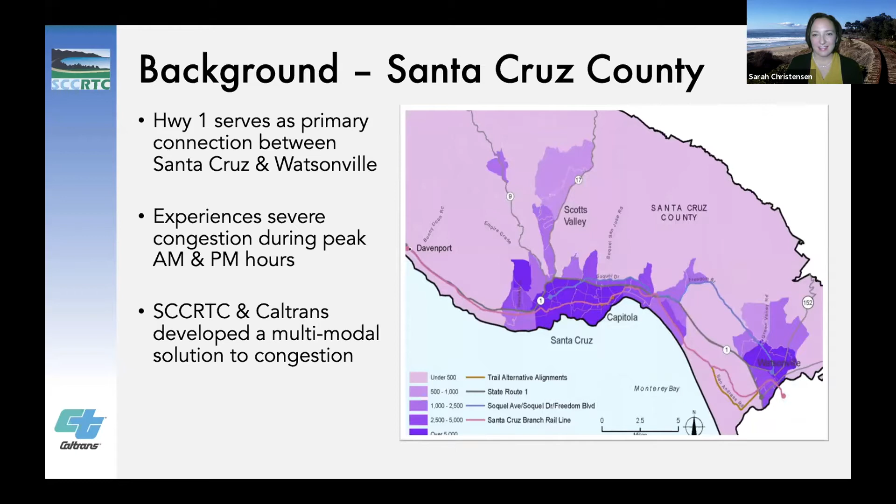What's unique about this county is we're one of only two counties in California with the ability to operate transit buses on the shoulders of major highways. This legislation passed in 2013 and allows Monterey Salinas Transit District and Santa Cruz Metro to operate buses on shoulders with approval from Caltrans and CHP. Monterey County is the only other county with this ability, but they've decided not to proceed with a bus on shoulder program at this time, so we have a really great opportunity to implement this on Highway 1.

I'm very happy and proud to say this project is fully funded. We have Measure D funds serving as a match for construction and to fund pre-construction activities, State Transportation Improvement Funds (STIP), and we recently were awarded a grant for three projects in this county from the California Transportation Commission. Those are Senate Bill 1 funds under two programs: the Solutions to Congested Corridors program and the Local Partnership program. With all of that funding, we are fully funded for this project.

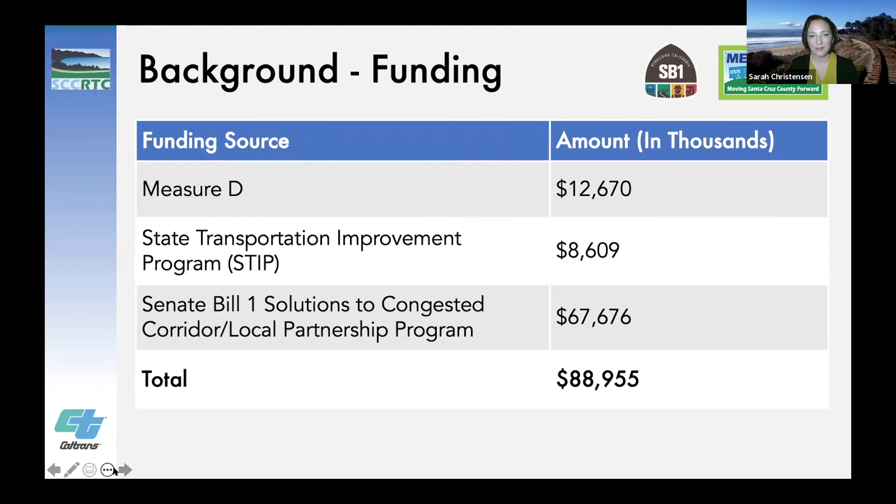As mentioned, we have a program of projects here. The first project underway, phase 1, will extend the auxiliary lanes. There are existing auxiliary lanes between Morrissey and Soquel, and this project extends them from Soquel to the 41st Avenue interchange. It will also implement a bus on shoulder facility for about a 3-mile segment, and build a new bicycle and pedestrian overcrossing at Chanticleer Avenue. This project is in final design, wrapping up and trying to get advertised for construction bids, with construction possibly starting next year if funding gets lined up in time.

The second project, shown in the big red box, is phase 2, the project we're talking about today. It will extend the bus on shoulder facility an additional 3 miles, add auxiliary lanes between Bay Porter and Park interchanges and between Park and State Park Drive interchanges, and replace the Capitola Avenue Bridge with a wider bridge including bike lanes and sidewalks, a huge improvement. Lastly, it proposes building a bicycle and pedestrian overcrossing at Mar Vista Drive.

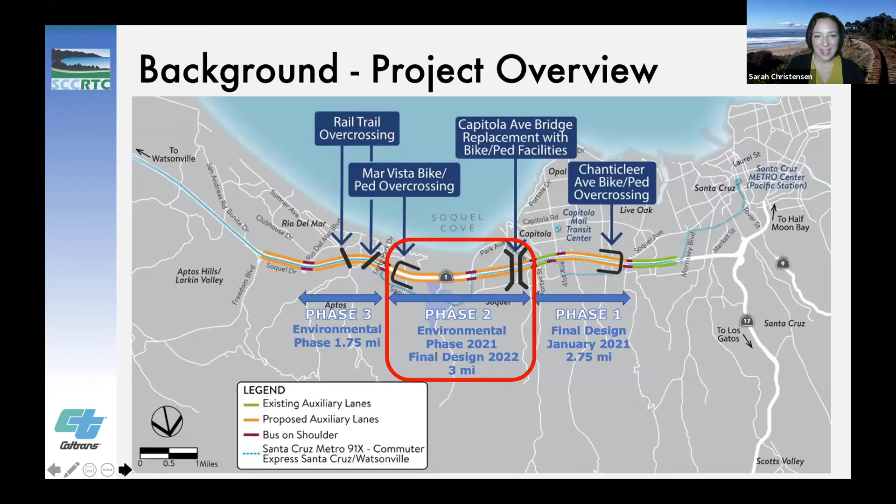Thanks, Sarah. So what I wanted to do is walk through some key aspects of this project. Like Sarah mentioned, the project spans roughly 3 miles, and that's a lot to explain on some slides, so we'll do our best to illustrate all of the various components through the next several slides.

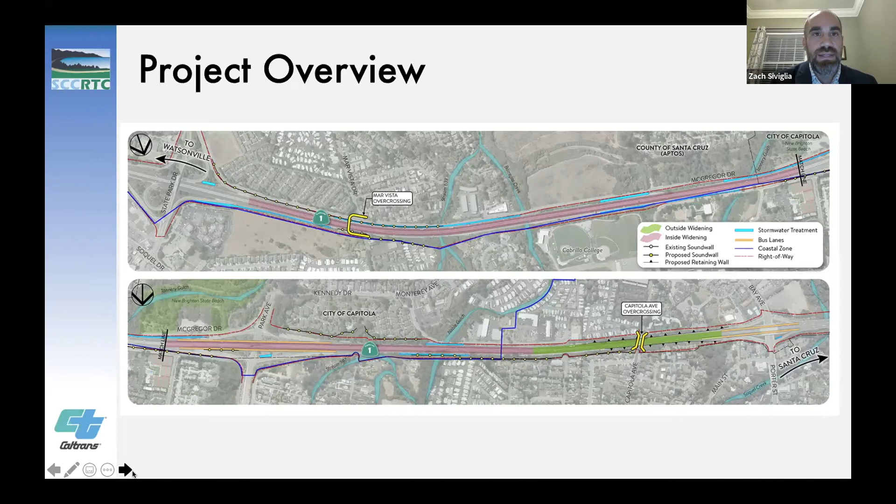Also, that black line with yellow dots again shows locations of proposed sound walls along the corridor. All right, next slide, Danielle.

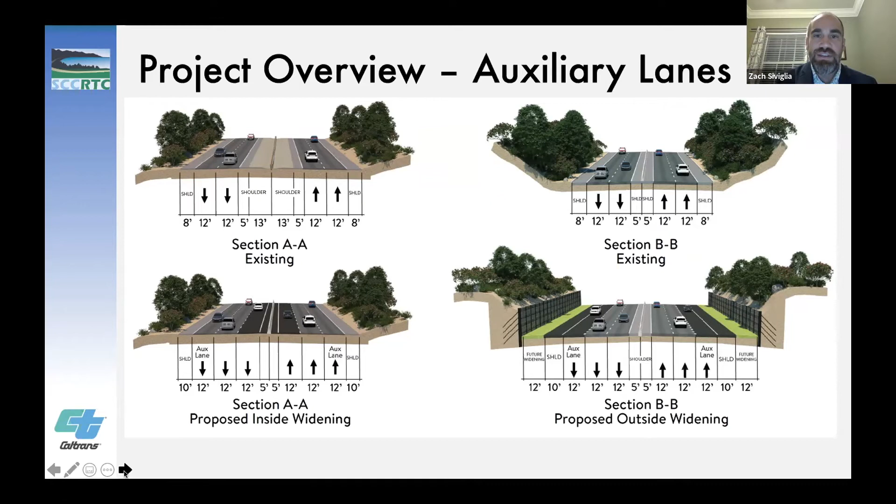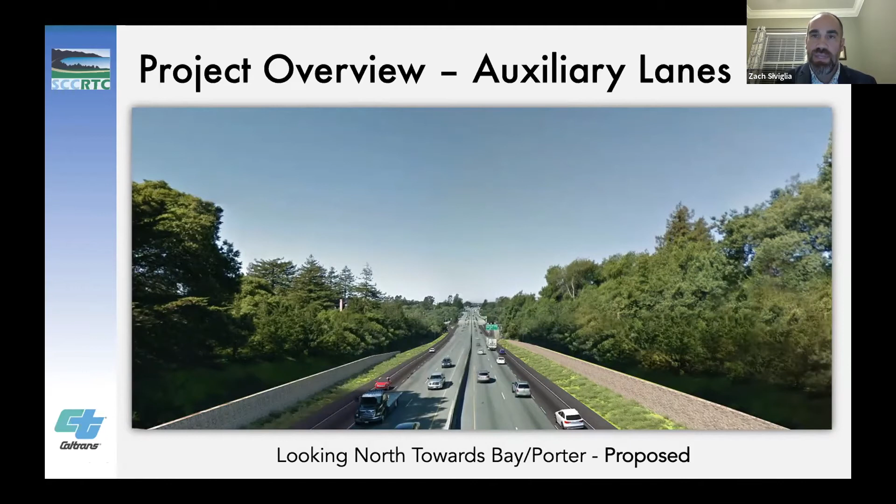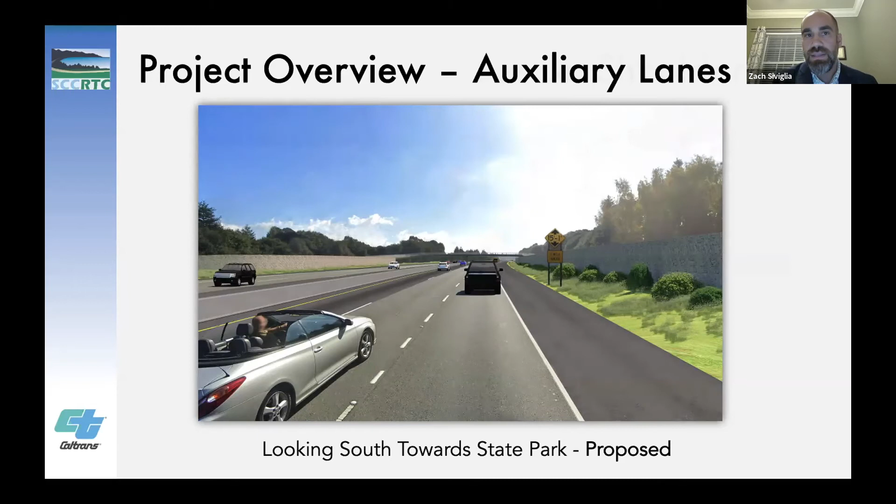Sarah covered the bus on shoulder concept and the unique aspects this project allows. The county is unique in allowing bus on shoulder on the freeway, so I wanted to quickly illustrate how that process works for this corridor.

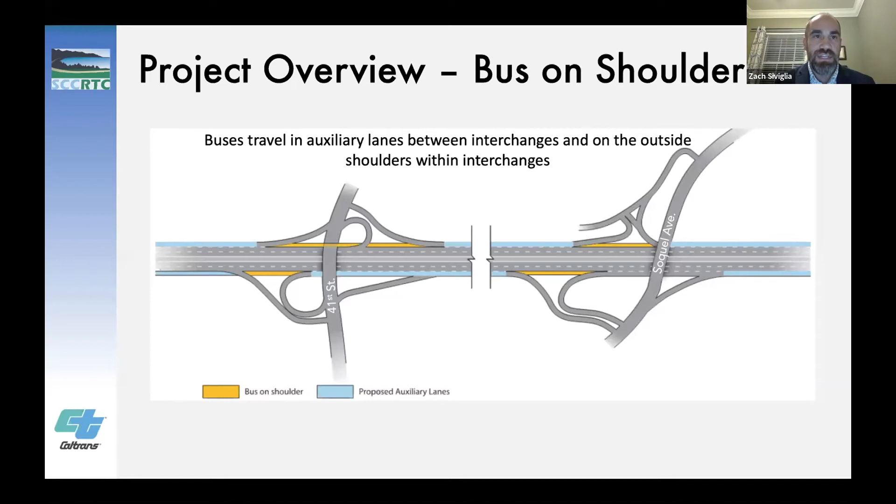Next slide, Danielle.

Next slide, Danielle.

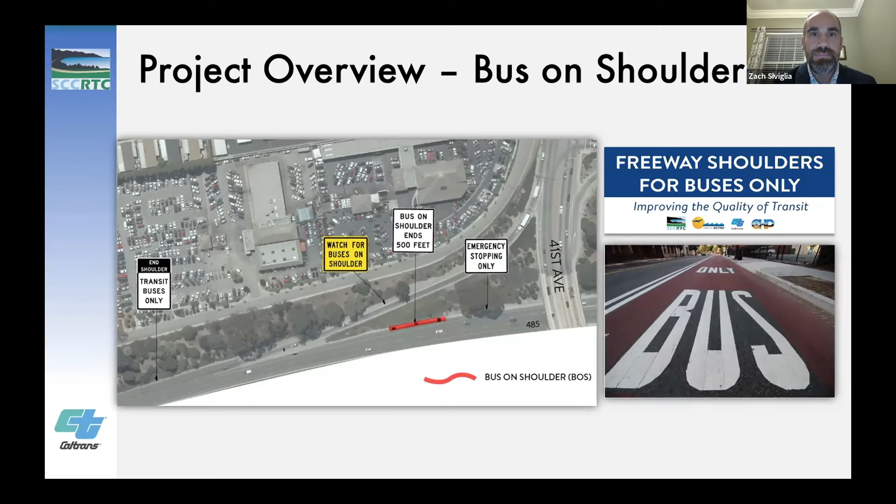The pedestrian overcrossing, because of the requirements to provide ADA access across this structure, ends up being a little longer than what you would normally expect. That's because there are maximum grades that govern how we can get up over the freeway traffic.

Next slide, Danielle.

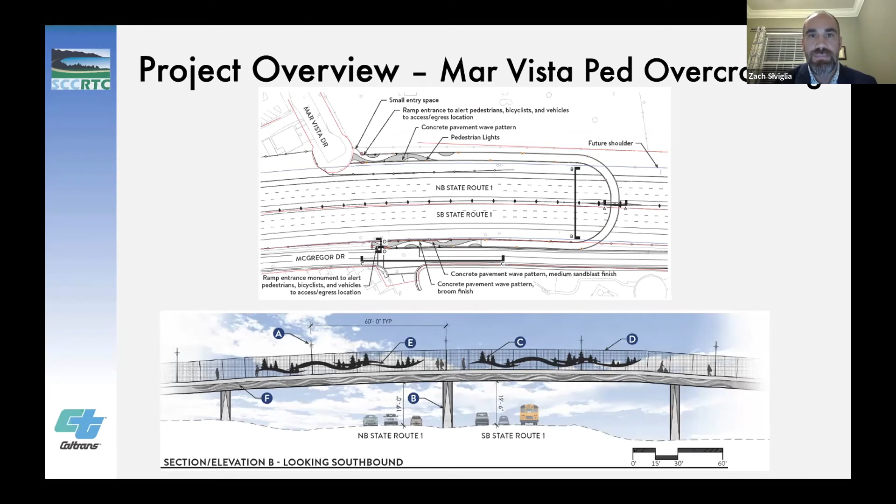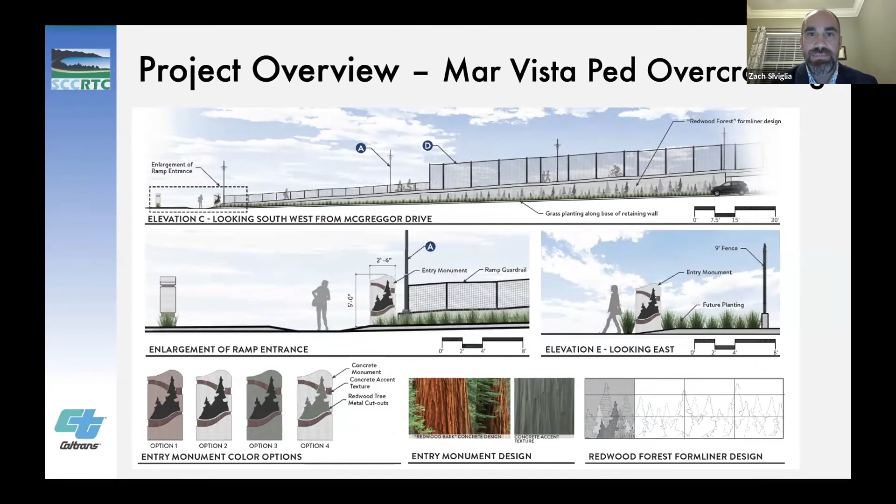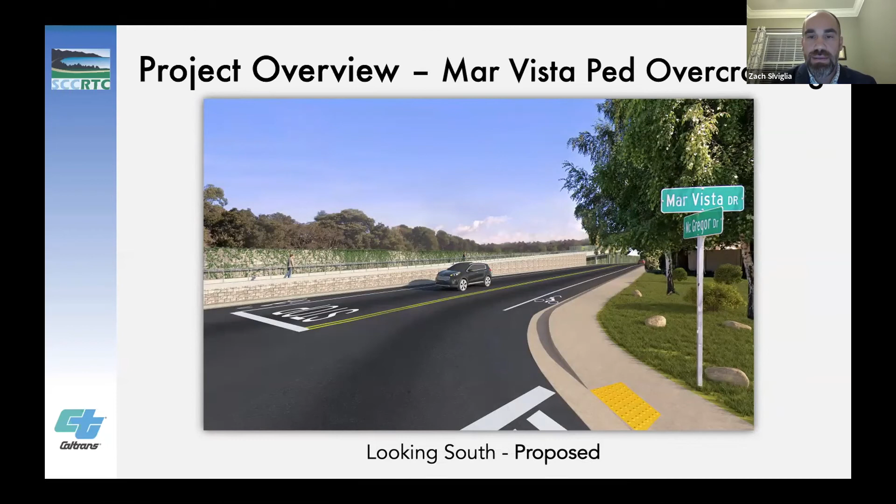Next slide, Danielle.

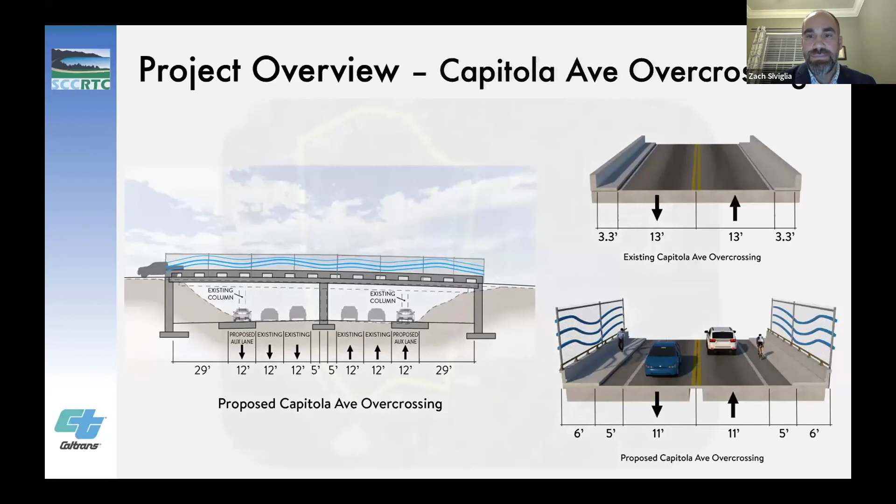In order to build this project, what I wanted to highlight is that Capitola Avenue overcrossing would need to be closed for a period that's roughly around 14 months, in order to build the new structure.

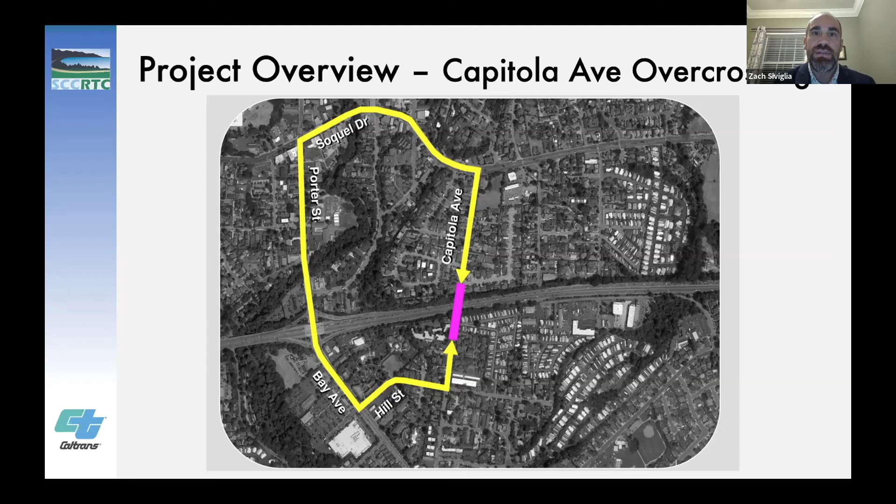To accommodate traffic, we've identified this detour that would go over to the Bay Porter interchange, up and around to Soquel Drive and then back. This represents the longest path if you were standing on one side of the bridge and wanted to get to the absolute opposite side. Again, we anticipate this detour would be in place for roughly 14 months.

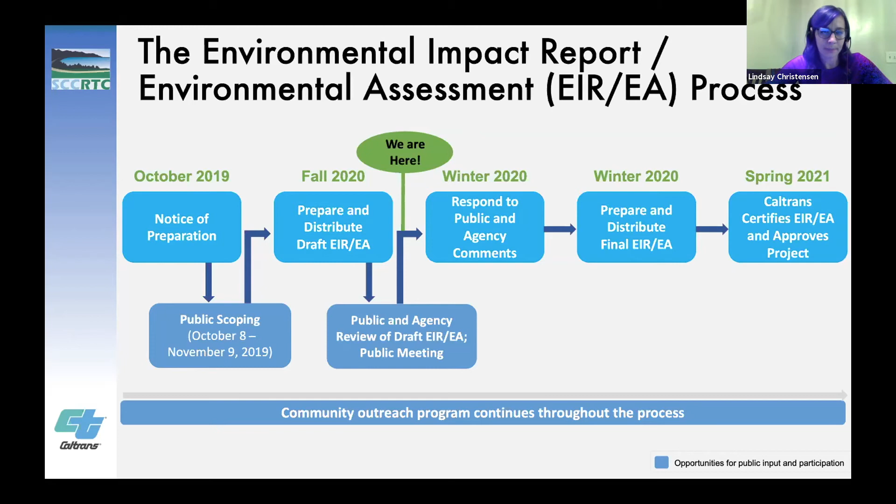This slide shows an overview of the environmental process. We recently released the public draft environmental document, and we are currently in the phase that shows a public and agency review period, which is about a little longer than 45 days. This meeting is another opportunity to hear from the public directly. After the comment period closes on January 11th, we will be reviewing all the comments and providing written responses to each of them in the final EIR, which should be around winter 2021.

This document is a combined document, so it satisfies both the California Environmental Quality Act and National Environmental Policy Act. So it's an EIR-EA. The Environmental Impact Report satisfies CEQA, and the Environmental Assessment, or EA, satisfies NEPA.

The purpose of the environmental document is to identify and disclose the physical environmental effects of the project and to identify feasible mitigation measures. We also assess cumulative effects and growth impacts, and we use public input during the decision-making process.

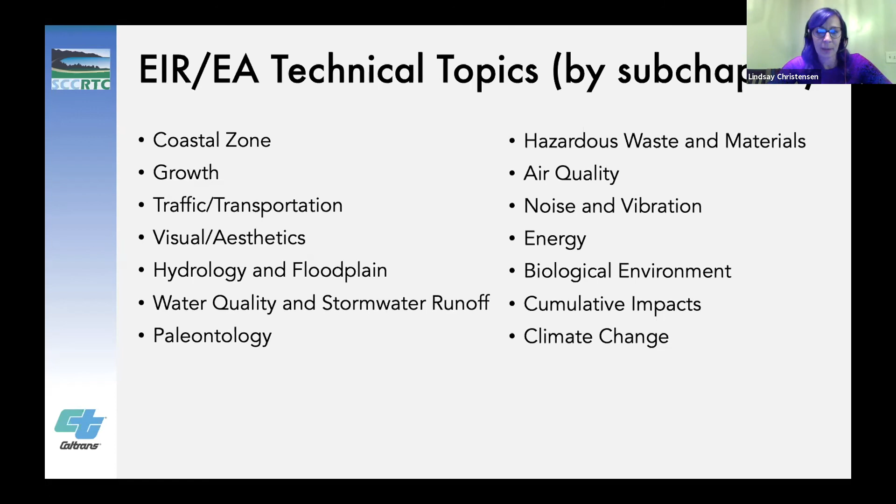Our document analyzes in detail impacts to the coastal zone, growth, traffic, transportation, visual and aesthetics, hydrology and floodplain, water quality and stormwater runoff, paleontological resources, hazardous waste and materials, air quality, noise and vibration, energy, biological resources, cumulative impacts, and climate change.

During the technical study phase and in our environmental document, we identified that these resources would have no impacts: land use, consistency with regional and local plans, parks and recreational facilities, community character and cohesion, environmental justice, utilities and emergency services, cultural resources, geology and soils, plant species, agricultural resources, mineral resources, and wild and scenic rivers.

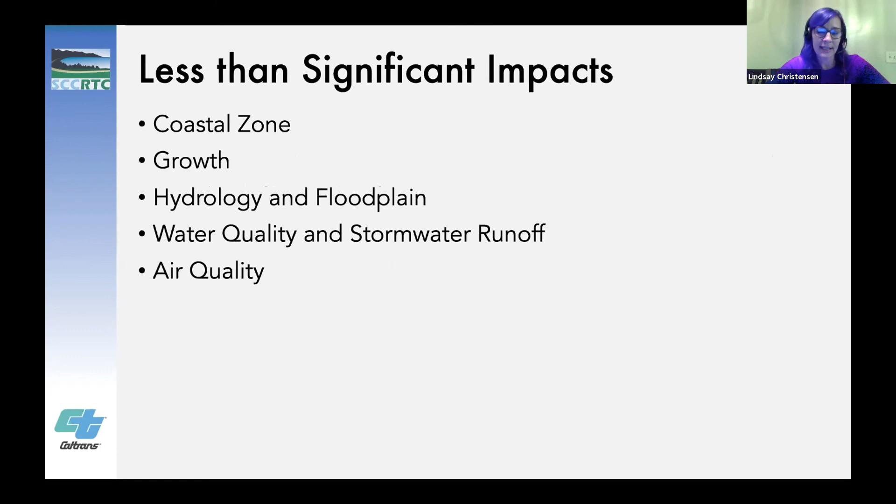We found that impacts to the coastal zone, growth, hydrology and floodplain, water quality and stormwater runoff, and air quality would have less than significant impacts and no mitigation would be required.

These resources—paleontological resources, hazards and hazardous materials, noise and vibration, energy, and biological resources—were found to be significant, but could be reduced to a less than significant level with mitigation measures.

We found two resources conservatively to be significant and unavoidable. State Route 1 is an eligible state scenic highway. Some mature vegetation would be removed and sound walls would be constructed. We do have mitigation measures that would reduce this impact, but not to a less than significant level.

For traffic and transportation, in the traffic analysis, we modeled existing conditions, opening year 2025, and horizon year 2045 for both a no build and a build scenario. We looked at morning and evening peak periods, and we found that in some scenarios, VMT, our vehicle miles traveled, would increase on the main line, which is why we call this significant and unavoidable.

So the added capacity, while it would increase VMT in some scenarios, we're expecting it to largely be offset by the transit improvements. We also found that there would be fewer bottlenecks under the build scenario, and level of service or delay and average speed are both projected to improve.

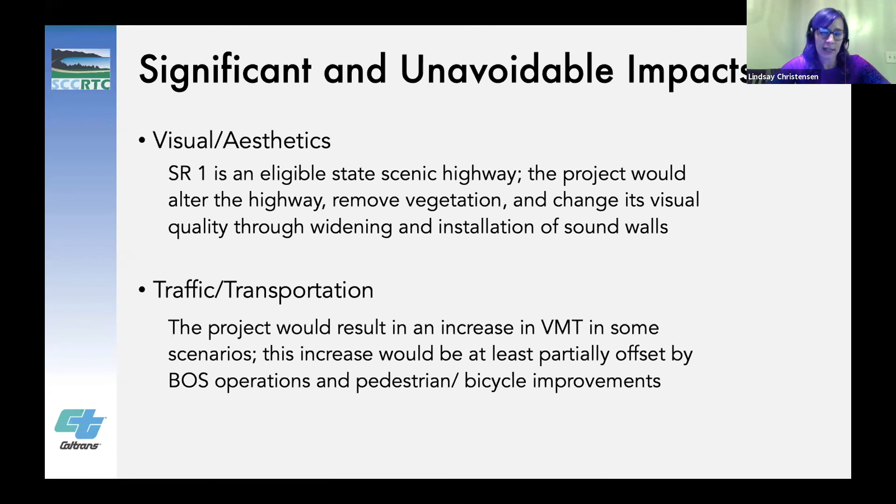And then construction—we're looking at having the project construction ready by the end of 2022 and beginning in 2023. So just follow the RTC on social media and check our web pages periodically for updates, and we'll try to keep everybody as informed as possible.